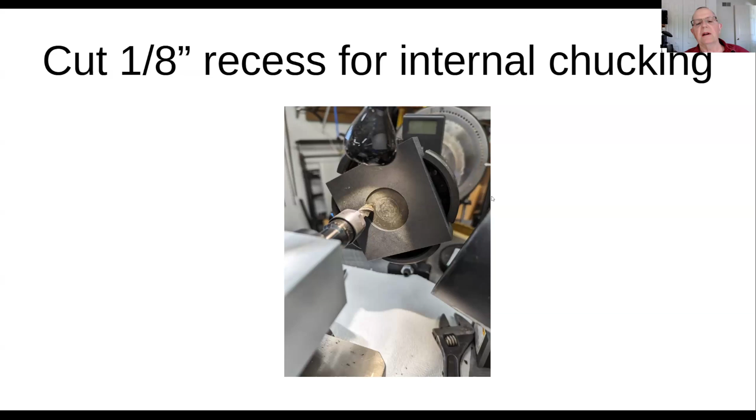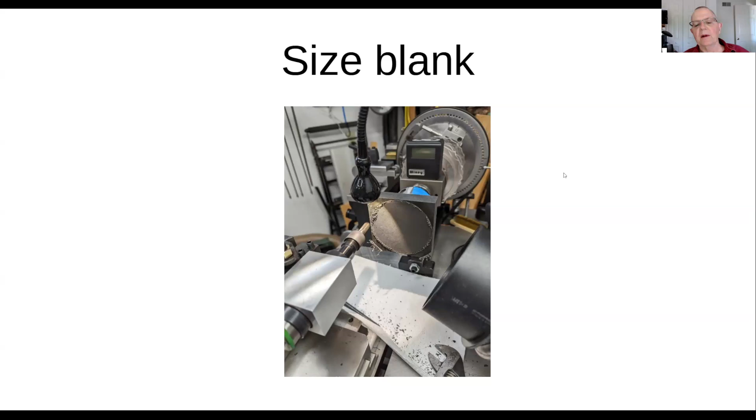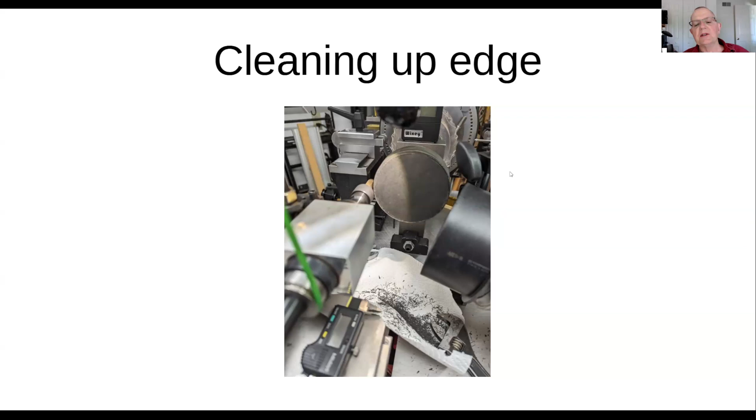What I did is I held this 4x4 piece with big jaws and cut an 1/8 inch recess for internal chucking. Then I took that and cut the 4x4 down - I had to size the blank. So we set that up on the Rose engine and brought it down to a pretty precise size - within 1/1000th of an inch. So now here I'm cleaning up the edge of that, and this is getting ready to start the process.

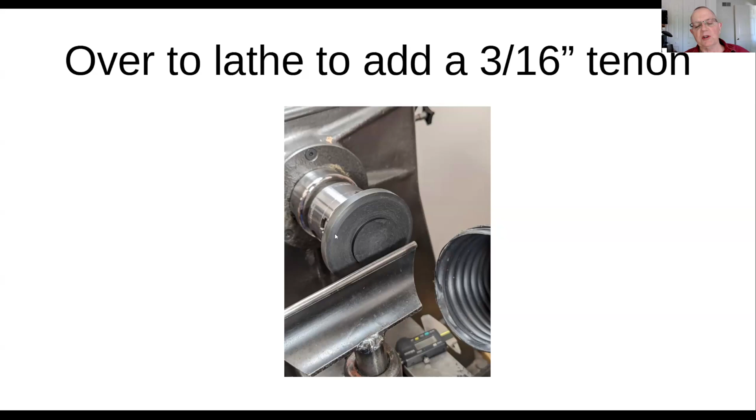I went over to the big lathe, and what I did is I cut about a 3/16 inch tenon on this, and relieved this corner. You've got to be careful because this stuff chips easily - the dimensions and everything is so tight. So you just cut this corner off, and I put a tenon to hold this while I work. Now I set up what's known as a 24 bump rosette here, and set that up for the bottom design.

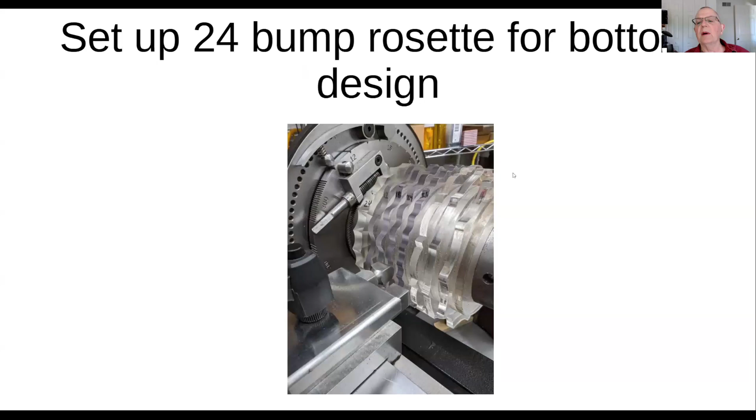And now what I did is I have that tenon formed, and I decorated the bottom. That's just like anything, people flip things over and want to see what it looks like.

I'm cutting this with an eccentric cutter. This is angled off about 15 degrees towards the outside edge. What that allows me to do is cut the center down just a little bit so when it sits on a table, it doesn't touch.

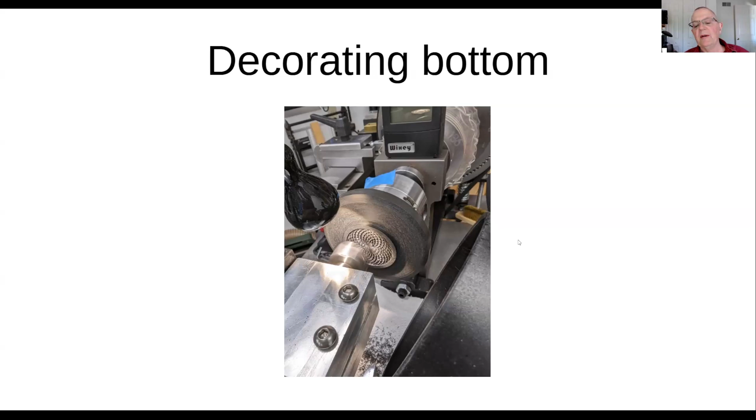So this is it, this is done. What I've done here is I've cleaned this up after I cut a radius on this. Now we're looking at the bottom of this small dish. I cut a radius on this, and I added a little detail right here. That's only about a couple thousandths of an inch. I wanted to break up that visual line.

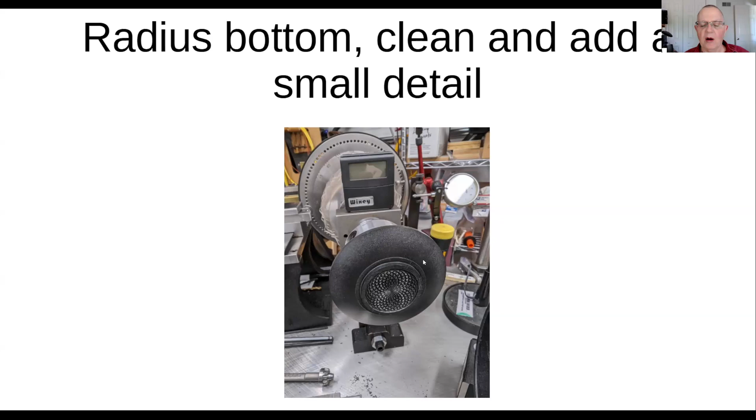Now this is where it's going to get chucked up, but it runs from here up, and I just thought this adds a nice visual when you turn it over.

Now I set up, this is called an 18 bump D shape. This is shaped like a D rosette with large radius rubber, and this is what rubs against the rosette and makes this go back and forth. With this setup, this large radius allows you to change the amplitude, the height of how this bump works on the machine. This typically is 187 thousandths. I did this, and it ended up lowering it to about 70 thousandths, so I was only running about 35 thousandths each side of center.

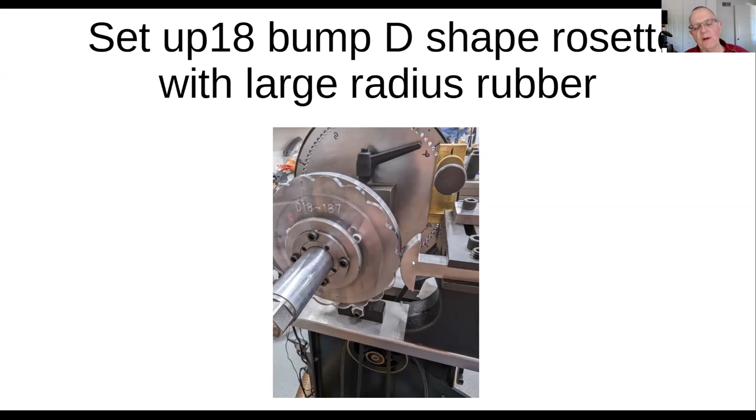Now, what I did is I cut this outside edge to give it design, and then I undercut that here. So it gives it some character.

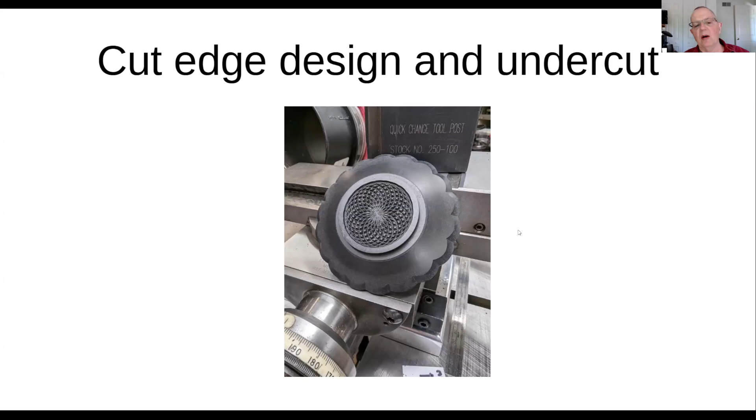Again, we're looking at the bottom, and now I'm going to turn this around. This is actually what that looks like. Again, this is only 3.5 inches across, but when you cut this out like that and then put this edge on there, it gives it some character.

And then you can see it sits on this base. This is a closer look at that. And what I've done, sometimes these are cut - this is a barleycorn design.

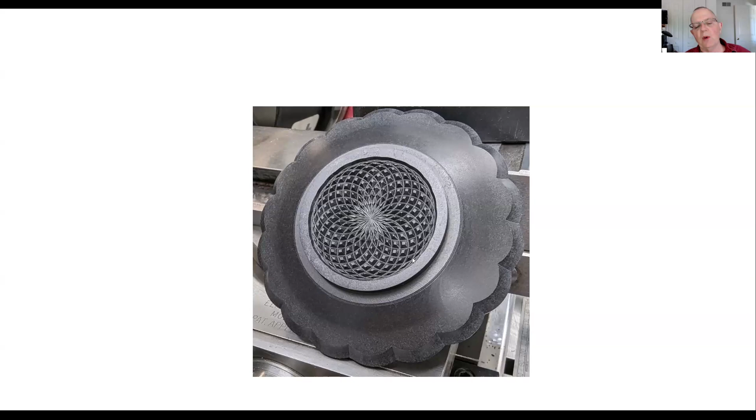Sometimes these are cut to come to a point, and I don't like that on this, because I like to, when you flip this over and you're moving it, it picks up the light. The light on these small squares really makes this come out in a 3D effect. That's a little jewel you got there.

Now I turned that, actually we were looking at the bottom. I turned that around and remounted that, and I cut the top edge.

Now, what I did was a little different. It's not the normal thing to do because it's really hard to line up. This was the top edge of the bowl, which would look like a normal bowl. I cut that back just enough to give this little line right here as part of the pattern.

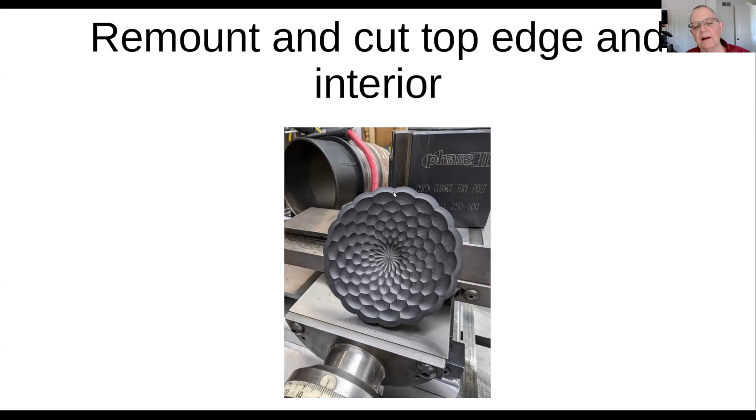The problem with doing that is when I've cut the side edge, I undercut it in the back. When I do this though, and I set this up to cut the center, getting this to match is extremely hard because I want this line to intersect perfect right on top of this.

What do you mean really hard? What do you have to do to do it? I've made this cut, this first cut here is inside. So this is on the edge, but now I go over the edge and I'm doing the inside.

So did you make a test cut and then see how it looks and fiddle with it, or what do you do? No, when you make this first cut, I'm cutting like back in here. Now this is total thickness when I start. So I cut back in here and I will do a test cut. We got to be very careful because between here and here is only 50 thousandths of an inch.

So I cut back here and I know the numbers, I just have to set up my numbers and make sure my stuff is exact. Again, I'm only swinging off center 35 thousandths of an inch. So I ended up bringing this, and you bring your cut back to get this edge where it's either visual or you have something plotted out.

And usually what I do with these is different materials have a different look. So I brought this back to where I just thought it was visually appealing. And then I made this first cut. This first cut, typically you go between 50 to 75 thousandths.

I did go to 75 thousandths, which gave me some depth down into the dish. Then I make this cut, and what I have to do is phase this, where I make my next cut half off. So this center has to be half off of this other center, dead on. You set this up, and ahead of time you can plot according to the depth of the bowl how deep your cuts are going to be.